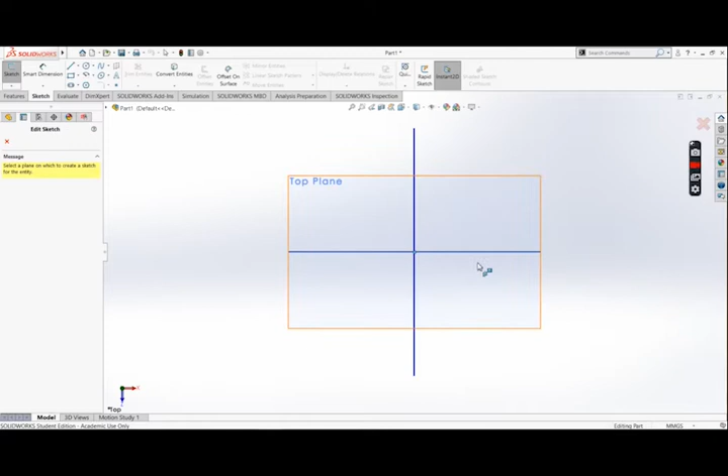We are going to design a part in SolidWorks, this one. So the first thing is to draw the base. I have a technical drawing that we did yesterday, like this. So I'm just gonna represent that here with the dimension. The large base dimension is 20 millimeter. 20 millimeter.

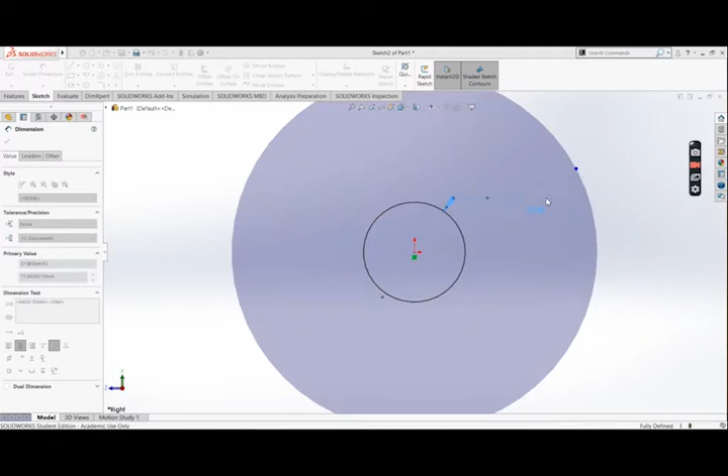And the base has a handle that locks also on the outside. I'm just going to represent that here. So we have this construction line that will help us indicate and place that. Let me show it's horizontal. Here we go. Next step is to draw the handle.

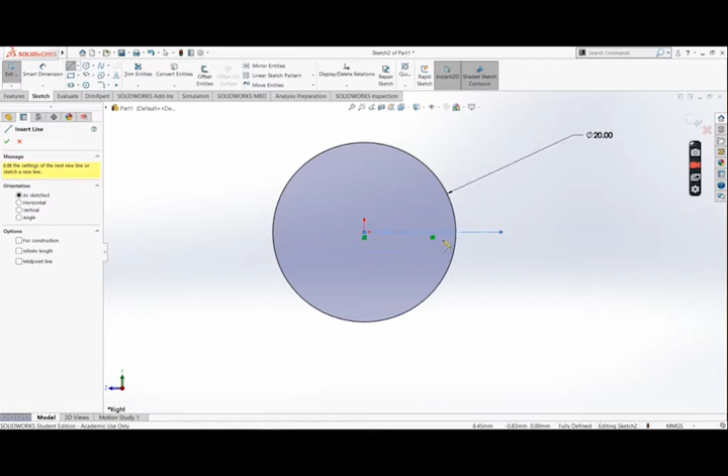The larger side of the handle is 5.5 millimeter. What I'm going to do is to draw half of that, which is 2.75 millimeter. And then I'll mirror that. Oh, that's perfect. 2.75. Just then mirror that. There you go. Then you have 5.5 millimeter.

I'm going to bring it close to the circle, to the circumference of the circle. Good. The other side is 2.75 millimeter. I'm dividing 2.75 millimeter by 2. This is 1.37. We do the same thing here. 1.37. Smart dimension. 1.37. 1.375. We mirror that.

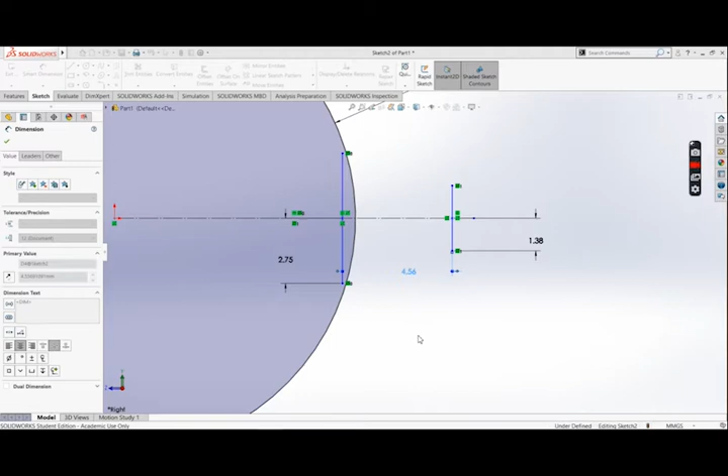This is good. And now we know that the distance that separates this edge from the other one is 3.15 millimeter. So just going to implement that, 3.15 millimeter. Bingo. What we have to do now is to connect both edges. Awesome.

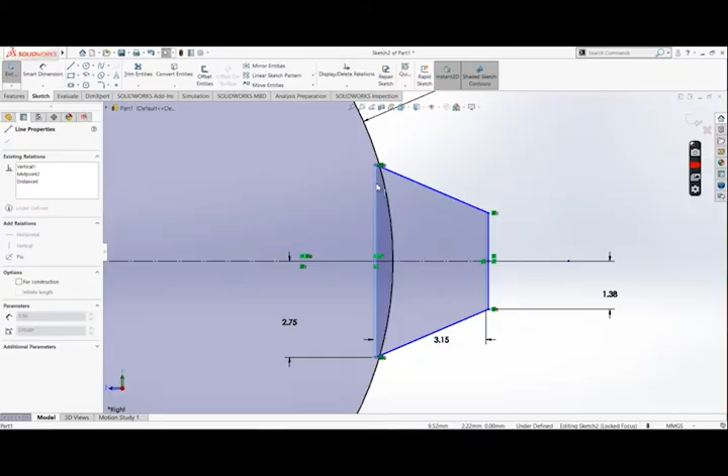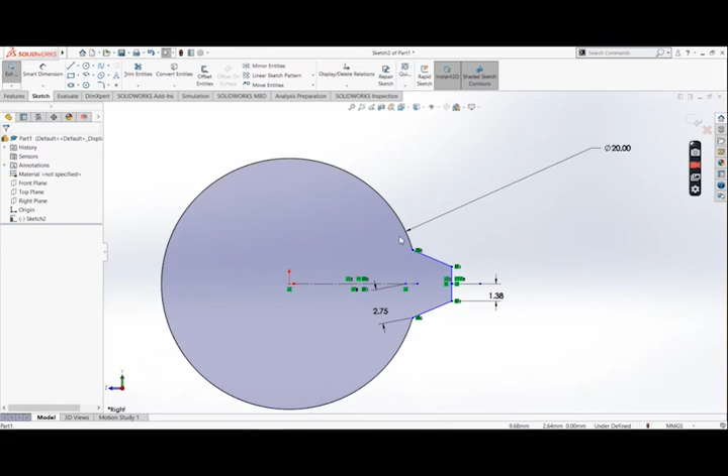Now, what to do next here is to trim. We do a trimming here to connect everything. Be careful. Control Z. Now, moving this to snap fit here. Here we go. It's cool. So we have that handle placed, and we close the sketch. Next thing to do is to extrude. So the thickness of the largest area of the base is 2.5 millimeter. Extrude 2.5.

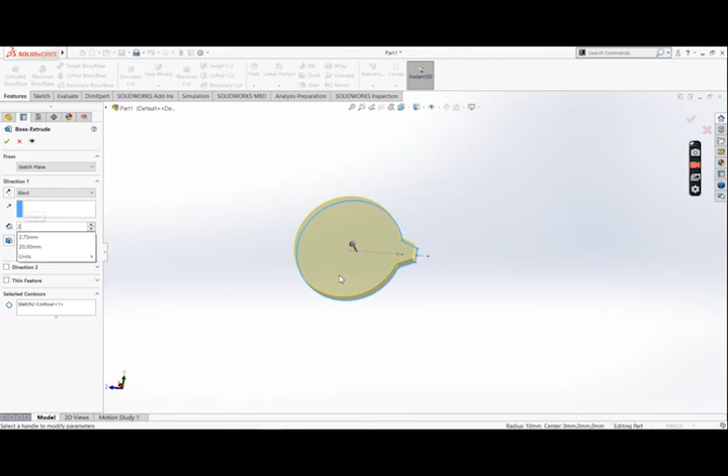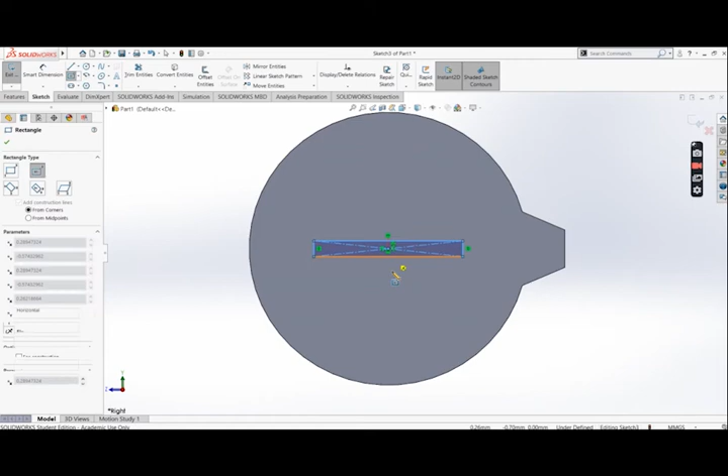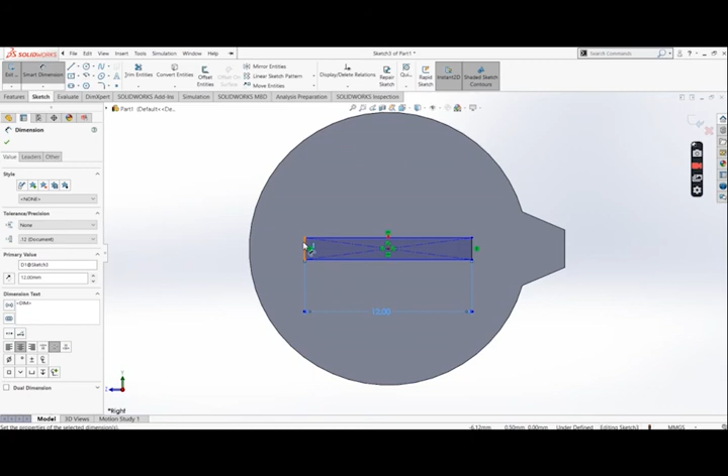Let's place the hole in the back. Or let's do it right away. Control 4 to see the bottom area. Bottom area, sketch, rectangle. You can decide to sketch from the center if you want that. So extrude cut 2 millimeter.

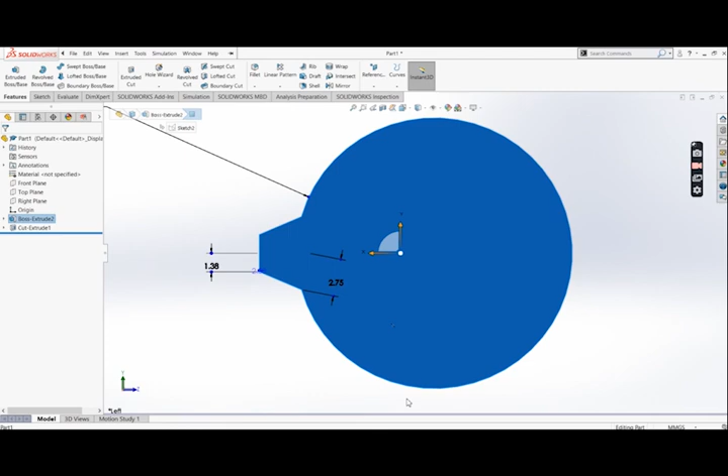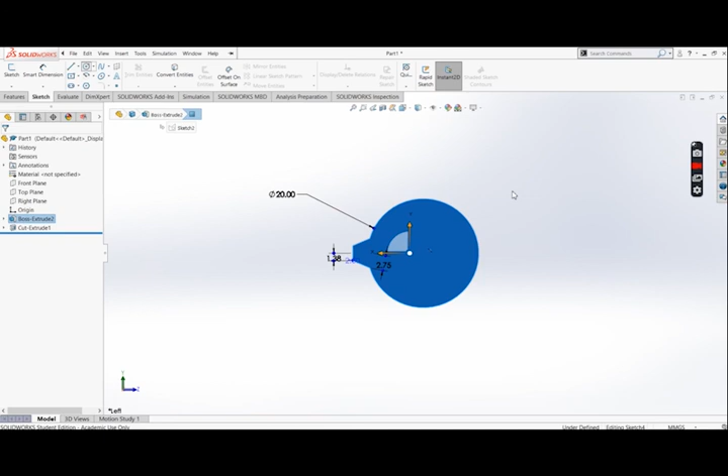The diameter of the middle circle is 10 millimeter. Then let's draw it here. Show you how we form the center. Smart dimension. Then extrude boss, and you don't need to measure anything right now.